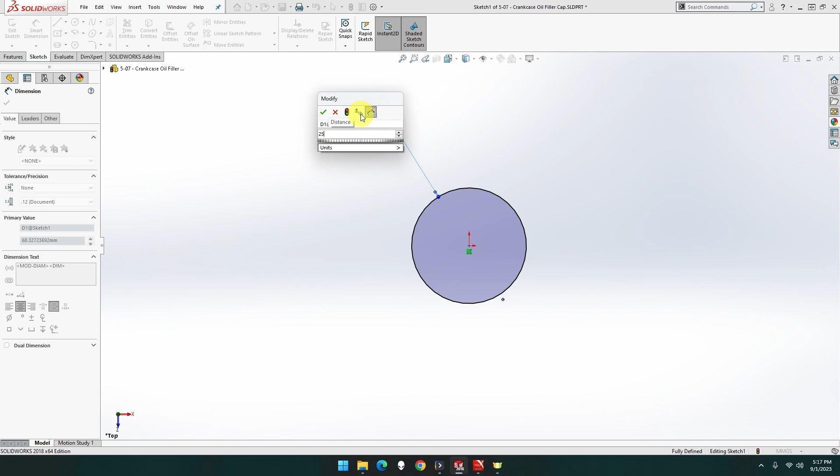Alright, let's open up file, new, part MMGS. Let's go to top, sketch. We want to do a circle, it's going to be 25. Now that's going to be a depth of 9.

I am going to do mid plane on this one. That may come in here a little bit later on. We've got to put a pin through there.

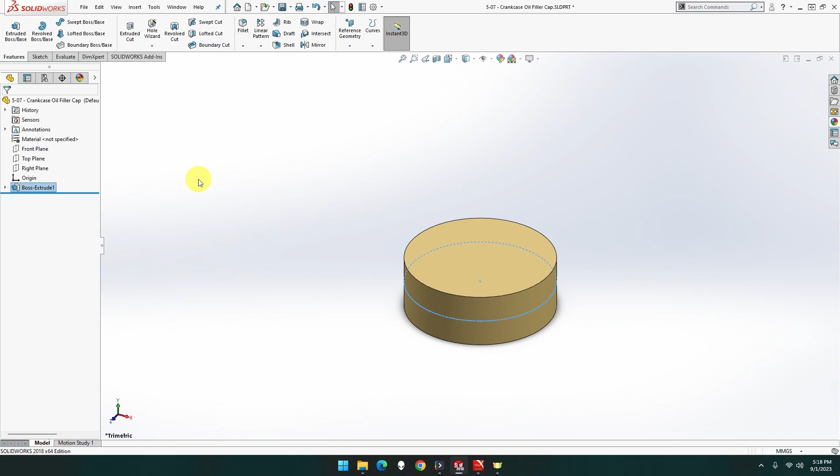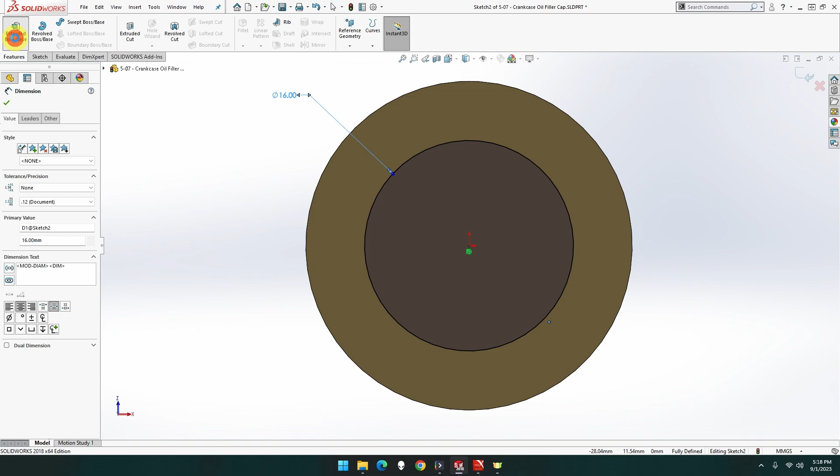Now if we go bottom one here, sketch another circle. That's going to be 16. That's going to be out by 12. And done. Before we go any further, I'm going to put a thread on that.

Thread should be, actually nope, we want to do a plane first. So do the plane on that. Beautiful. Done. Now we can do the thread.

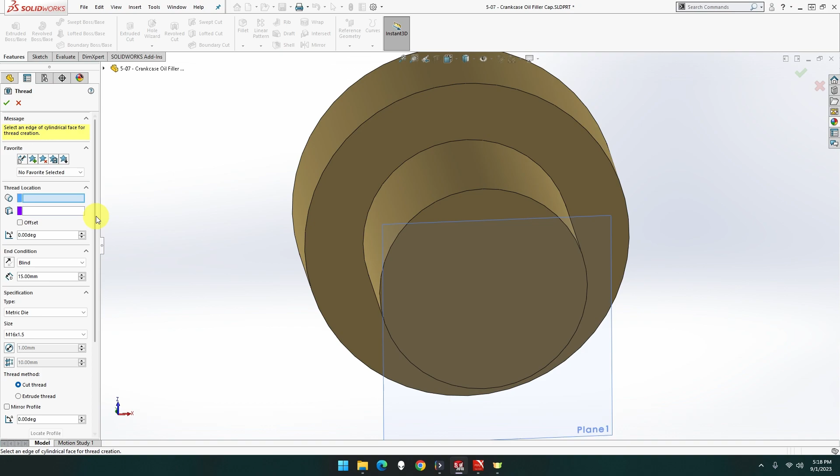Thread. We want this cylinder here, oh sorry, the circle. We want that one there, but we don't want blind. We want up to selection, which is that one there. There we go. Beautiful.

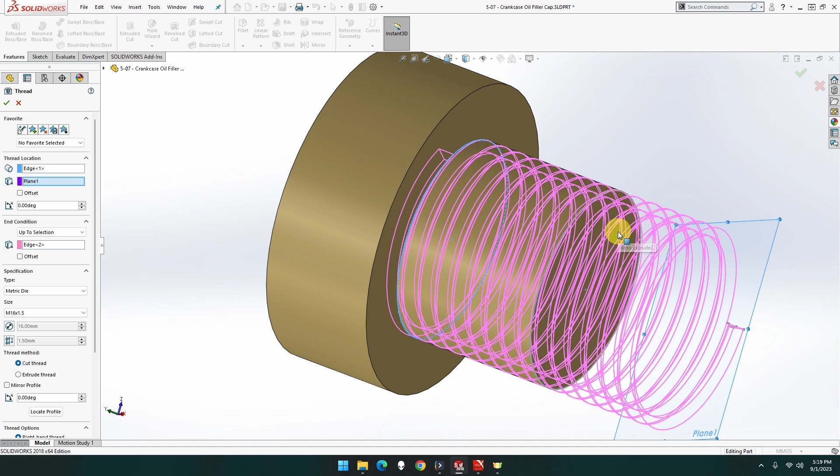Oh, hold on, clear that one because that's the wrong one. Should be that one there. There we go. Because I was thinking, why didn't it go past? I clicked that face there, not the plane. So you got to be careful on that.

Extrude. Let's see, trim, and done. Oops, sorry, cut and done. And hide. Now we want to...

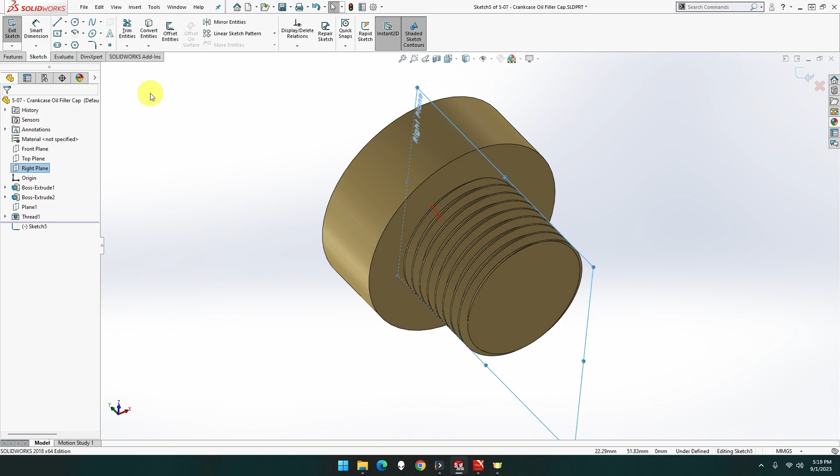Let's see, not top, right plane. Oh, hold on, get out of there. Normal To first. Now, there we go.

Now this is where that part here would come in handy. So this is normally a press fit piece, but I'm just going to build this one piece. Normally you put a hole and it's going to be press fit in, but I'm just going to build this as one piece.

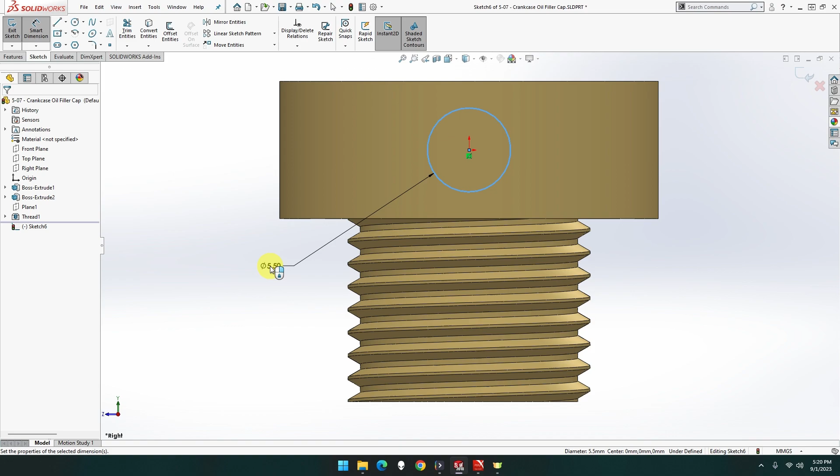Smart dimension, that is going to be 5.5. There we go. And that's going to feature extrude. It's going to be 37 divided by 2, 37 length, it's 18.5. It's going to go both ways, 18.5, and done.

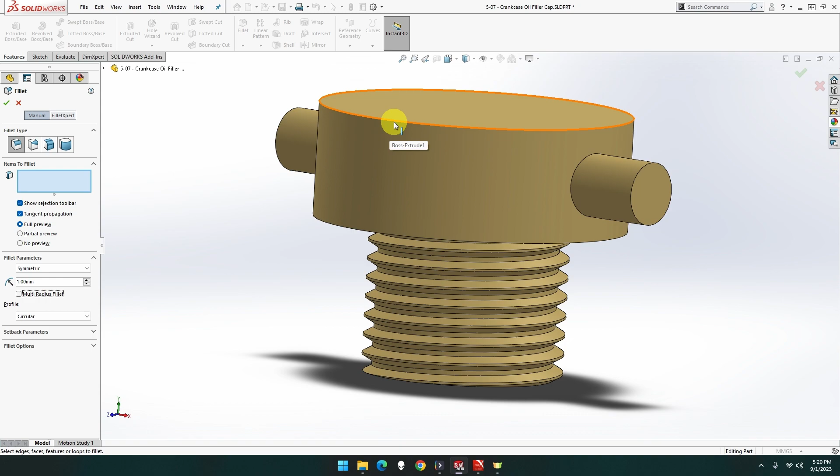Beautiful. Now we want to do a fillet. That's still on 1, nope, it's on 10. That can go there, there, and there. There we go. Yep, that looks good. And that should be done.

Yes, it is. That's that piece done. Let me turn that there. Beautiful.

So that's part 5-07, the Crankcase Oil Filler Cap done for the Clayton Undertype steam wagon.